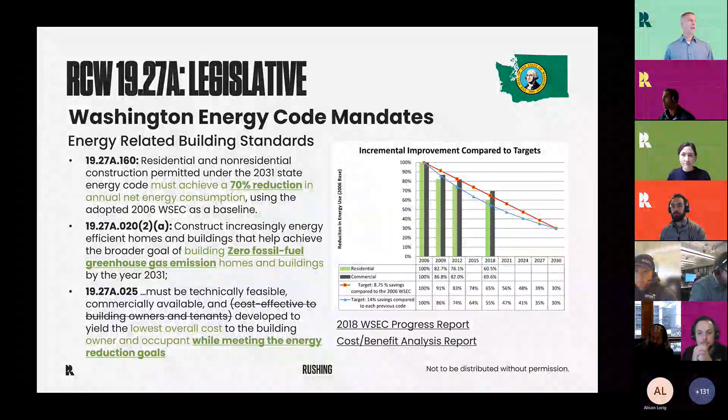Let's pop to the next slide. As we know, we're tracking behind where we need to be. The report for the 2021 state code is not yet out. There have been some preliminary reports, but generally the state process is just ending in November, and usually by January there's a draft report to the legislature on how we're doing to meet our goals. So that's still in development, but we know that we're behind pace, especially in commercial buildings, and that we need to harvest all the good ideas. So we have big goals in Washington.

The next slide shows, yeah, go ahead to the next slide. This shows that... Sorry, Eric, I'm doing my best over here. I'm clicking back and forth. Yeah, there's still a lot of people popping in, so it's great.

We also have big state goals about how to clean up our electrical grid to make it carbon free. Those were recently passed in the last few years, and we're working on plans for how we clean up our energy production to eliminate carbon emissions. And so these goals are all set in place, and utilities and others are working to achieve them. So let's pop to the next slide.

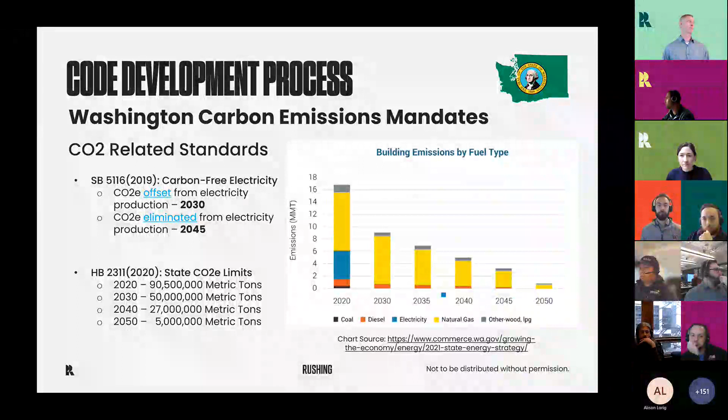So as we enter into Seattle's process specifically, Seattle has its own set of resolutions that come through the mayor's office. The recent ones that we're tracking really start back in 2001, that Seattle's goal is to develop an energy code that's 20% more efficient than 90.1. There's really no specific cost check and balance with that goal. That's the goal of the city, and they can do that for the commercial energy code as allowed by state statute. From there, there are also goals for greenhouse gas emissions. There's the Green New Deal, which happened in 2019, which basically targets no fossil fuels for buildings.

And then there's the Seattle Building Performance Standard that's currently in development based on a mayor executive order from 2021, from last year. So there are a lot of goals that Seattle has to go above and beyond state requirements. What we generally see is that Seattle is pushing the energy code forward in Washington and the United States. And what gets into the 2021 Seattle Energy Code is going to be a starting point again for the 2024 Washington State Energy Code. So this is a place for Seattle to push the limits and to start developing options for the state. So with that,

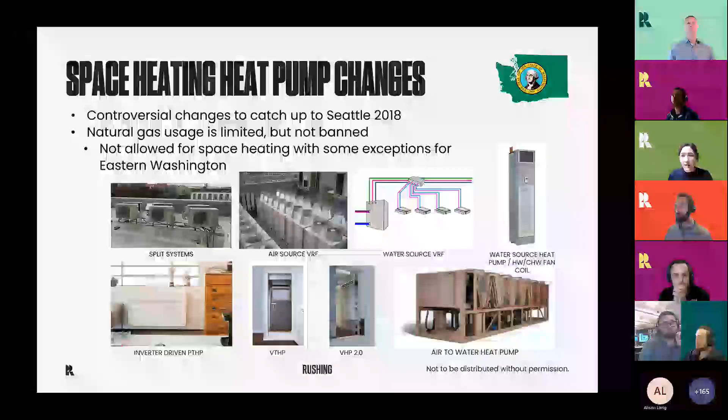A lot of folks are starting to look at the Innova or Epica units, vertical terminal heat pumps, or if you've got a hydronic system, air-to-water heat pumps to produce hot water. As well as some exceptions, again, for supplemental and backup electric resistance. Let's talk a little bit about the water heating heat pump changes. These were fairly controversial, a lot of discussion, a lot of time spent in technical advisory group meetings reviewing these proposals.

Where this landed for water heating was a little bit of a compromise solution that got into the final adopted package. So it's essentially 50% of load at 40 degrees Fahrenheit. So a little bit of an in-between of what Seattle adopted for the 2018 energy code, and then still allowing use of gas boilers for the remaining 50% and any backup heat source. So that's where that shook out for the state.

Sorry, go ahead. Yeah, I'd just like to point out that that's an example of, we tend to say, well, what happens in Seattle just gets passed on to Washington State Energy Code next cycle. This is an example of where they didn't just literally take the Seattle language and adopt it. It went through a lot of discussion and ended up in kind of a compromise place to make the Washington State Code more stringent, but not quite the full leap that Seattle did on domestic hot water heat pumping. Yeah, that's a good clarification.

Thanks for that, Nate. There was a lot of fun discussion at the state level on this topic about electric heat pumps versus natural gas heat pumps versus all other types of technologies out there. So 50% electric heat pumps, big step forward for the state.

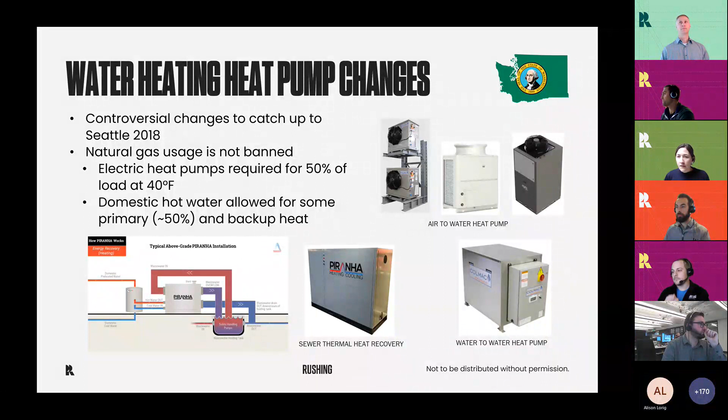All right, so C406 had some pretty significant changes. It's an additional iteration on the complexity that was introduced in the 2018 code cycle. Gone are the days where it used to just be, hey, you've got a list of 8 credits and you pick 2 off the list for your entire building. We've since moved into area weighted average credits where you can apply different credit packages based on your building occupancy. So you can apply different credits to, say, your group R2 portions relative to if you've got some group B components or things like that.

The 2021 Washington State Energy Code has introduced an additional layer to that, where now not only is your number of credits available varying by occupancy type, but now your target number of credits is also varying by occupancy type. And it's also switched to a carbon-based metric. So PNNL did a bunch of energy modeling prototypes and analysis to develop the requirement point targets as well as the points available for the different credits by occupancy type. And they've switched it to a carbon metric that I believe is like 0.1% savings as a point.

So that's why it looks a little scary that the point numbers have gotten really big of, hey, I have to get 54 points for my group R1 space, but it's just kind of a whole new metric and baseline for what those points refer to. So don't be scared by the larger numbers, but it is a more complicated calculation. But with that more complicated calculation is also more options. So now there's 31 credits to pick from in the state code.

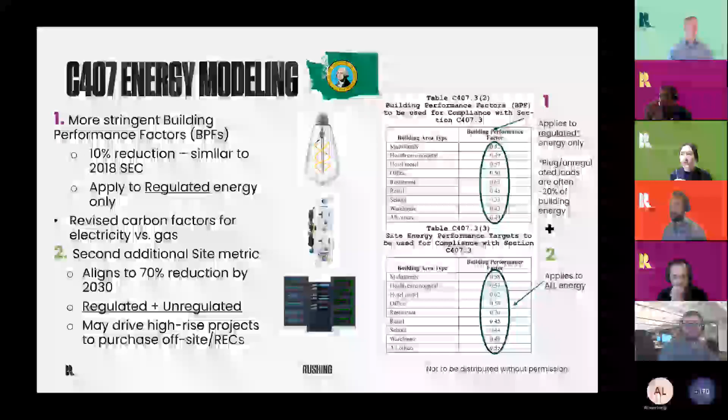Similarly for the C407 energy modeling pathway, so C406 is your prescriptive code pathway, C407 is your energy modeling pathway. What's new here for the state code is we've added a second site metric. So the 2018 code, we kind of are using a new modeling baseline. There's some pretty significant changes. We're using carbon factors as our metric in lieu of just straight energy savings. But what's being layered on for 2021 is we're cranking down those building performance factors, but then we're also adding a second site metric that includes both your regulated and your unregulated energy.

The current building performance factors only apply to your regulated energy, which is your HVAC, your lighting, things like that, and does not apply to your unregulated, which would be your plug loads or process equipment or things like that.

I saw someone just raised their hand, but then it went back down. Does anyone have a question they'd like to jump in with? Maybe an accidental hand raise. All right, I'm going to go ahead and keep going. And if anyone does have a question, please do raise your hand.

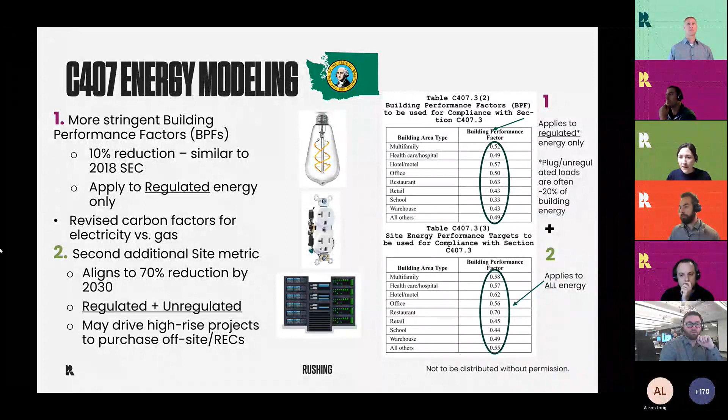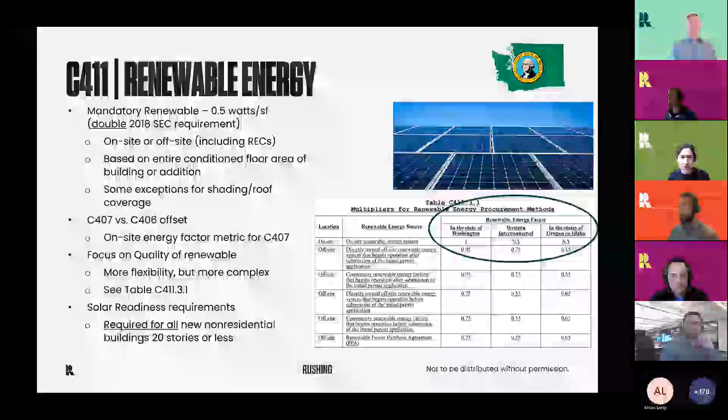So that's the significant new item for 2021 state level for energy modeling: we now have two metrics that we have to comply with, both a building performance factor and a site energy factor. And then we talked about this a little bit already, but a pretty big change for the state level is mandatory renewable energy. Historically, that's always been an optional appendix that some jurisdictions adopt, some jurisdictions don't. Now it's an across the board mandatory renewable energy requirement for Washington State. So that's a pretty significant jump.

There are some exceptions available. You can do that by trading for additional C406 credits. There's also opportunities to utilize some renewable energy credits, or you might hear them called RECs. But it's a pretty significant jump. So that's another big item that happened at the state level.

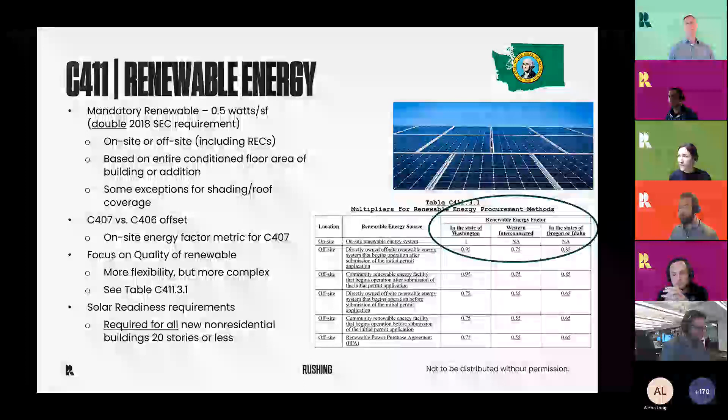I think the biggest takeaway that we always like to flag for folks is, the 2018 and now the 2021 code cycles are really driving a mandatory integrative design process. So that's getting feedback from the MEP early. That's making sure that there's a clear path for energy code compliance. It's making significant design decisions earlier and not just assuming that what you did on your last project that may have been under the 2015 code cycle is still going to work.

There's a lot of new things that are changing in the codes. So thinking that through up front and getting teams on board earlier to help inform significant design impacts of, for example, ERVs and floor to floor heights or things like that for multifamily projects is one really big example that has rolled in with the 2018 code.

Those types of things are going to continue to be really important for the 2021 code and beyond. And it just isn't going to be simple to shift a project that's under the 2018 code, that you want to delay start of or permitting of, to the 2021 code. I mean, it's different metrics, different systems,

different protocols. So I was just going to say, I hope some of our contractor friends who are on this call are ready to offer some pre-con estimating services as we sort through 31 C406 menu choices and try to find the optimal cost package. So again, we'll have more flexibility, but more options to consider in a lot of the changes to the code.

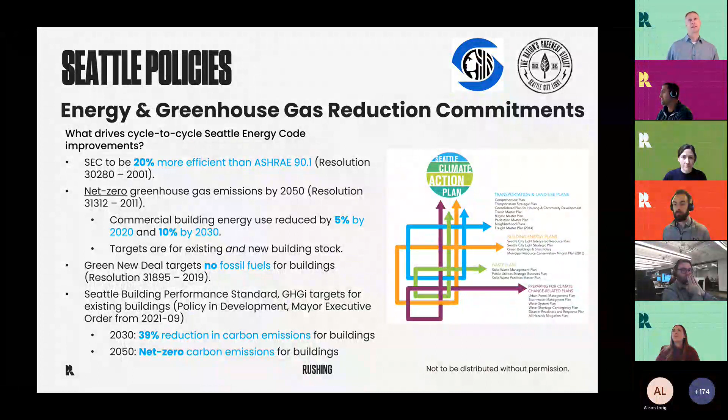And so high emphasis on the envelope, whereas with some of the mechanical systems and lighting systems, we know that they're going to be replaced or upgraded in 20 years or 30 years. So high emphasis on the envelope and how we build a quality envelope for the life of the building, basically. Let's pop through the specifics on some of these changes, Nathan.

but it's a pretty big departure from how we previously had things, which was basically regardless of building types, you would be up to 30% glazing, and then have to start using some exceptions to creep up to 40 or past 40% glazing.

And Andy, I'm going to hand it back to you. I'm sorry, I have to transition off. My apologies. Yep, no worries. Thanks, Nate.

So the second kind of biggest impact change is the change in glazing ratio allowances. Some are increasing beyond the previous 30% allowances, so that's providing some more options and flexibility for some building occupancy types. Some are decreasing slightly. So generally, though, providing more flexibility and acknowledgement that it's reasonable for different buildings to have different quantities of glazing.

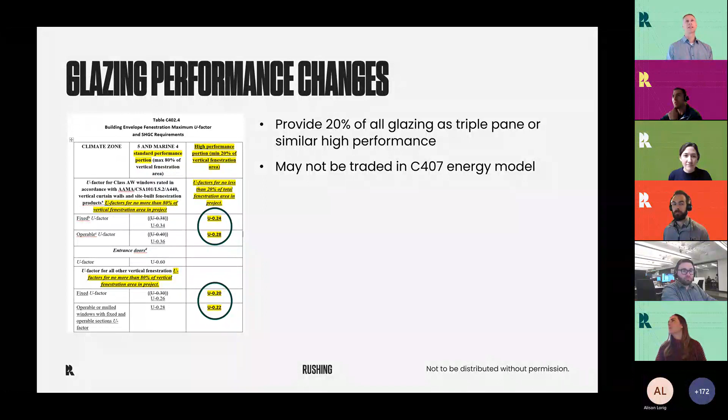I'm sorry, Eric. This may be my audio quality, but I didn't catch a good chunk of that. Was everyone else able to hear Eric's comments? Okay. Yes. Yeah, Andy, I was just saying that if space changes occupancy, then how do we track? All right. Do we have any other change? Did we lose you, Andy? Yeah, I'm sorry. I apologize if it's my audio cutting out. I'm only getting about half of what you're saying. Okay. Okay, let's move to the next slides.

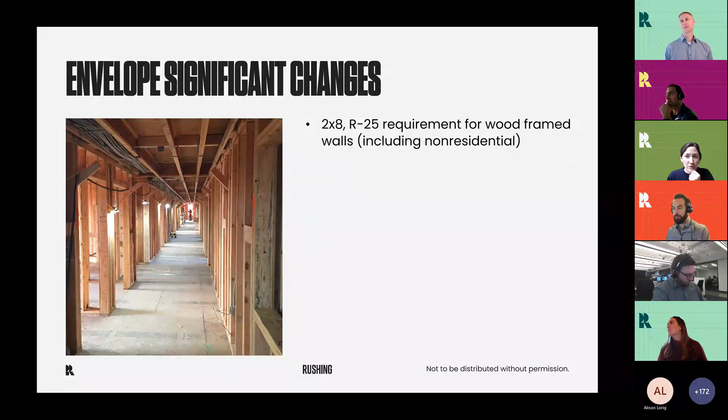All right, so last item is expanding the 2x8 R25 requirement to non-residential. So that's essentially the extent of envelope changes in the 2021 Seattle Energy Code proposals. So does anyone have any questions, thoughts, comments? Please do feel free to raise your hand or post a question in the chat.

Or does anyone have any other questions about what to expect for next steps in the code development process, or any other items? Yeah, Shayna. Yeah, thank you. This has been a really helpful conversation. Just one clarifying question with the ASHRAE 90.1. Is that the 2013 version that's being referenced with Appendix G?

It's ASHRAE 2019. So it's the new ASHRAE 2016 and 2019 are the new static baseline version, where it's essentially creating an ASHRAE 2004 baseline with the building performance factor that sets kind of a stringency beyond that baseline. The building performance factor will get tighter and tighter as the code cycles go on, but the baseline stays more or less the same. So it's that newest version, that new kind of static baseline methodology.

Was Shayna asking about the glazing percentages from ASHRAE? More specifically, the ASHRAE version that the percentages are being compared to. Yeah, where did those glazing percentages come from, Andy, is the question. Yeah, it's the ASHRAE 2019 glazing ratios, but then there's a few items that were somewhat low and got increased. So let me jump back down to that. So like the grocery store and retail standalone were more or less doubled. Got it. Thank you.